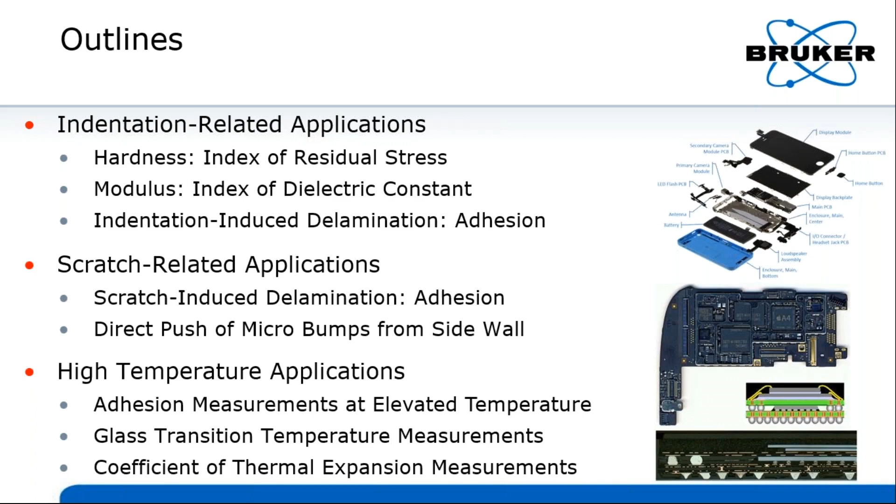Let's get started. Here we introduce the method proposed by Oliver and Pharr in 1992, which is commonly used in nano indentation. There are two key steps in the Oliver and Pharr method for the key value of projected contact area: one is the estimation of contact depth, and the other one is the tip geometry or area function.

Assuming sink-in happened at the sample at the contact with the indenter, the method uses the onset tangent of the unloading curve together with a correction factor epsilon to estimate the contact depth HC.

Once we know the contact depth, we need to know more about the tip geometry. We need a function that gives information about the indenter's projected area for each depth of penetration.

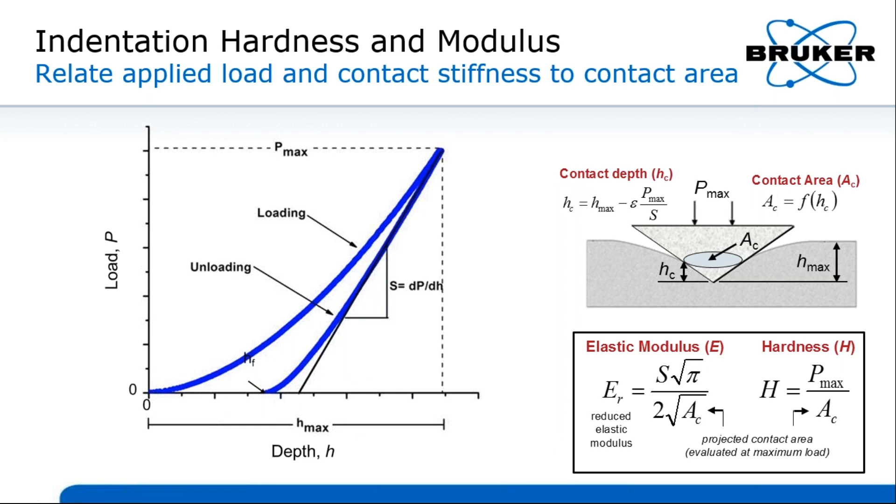Once the penetration contact area A sub C is determined, the hardness is simply the maximum load P maximum divided by the contact area. On the other hand, the reduced modulus ER can also be calculated using the unloading slope S and the projected contact area.

Therefore, the concept of one single test for one set of mechanical properties—one is elasticity and the other one is plasticity—is shown here. One biggest difference between nano and macro tests is that highly local stress-strain can be achieved and highly accurate positioning can be done.

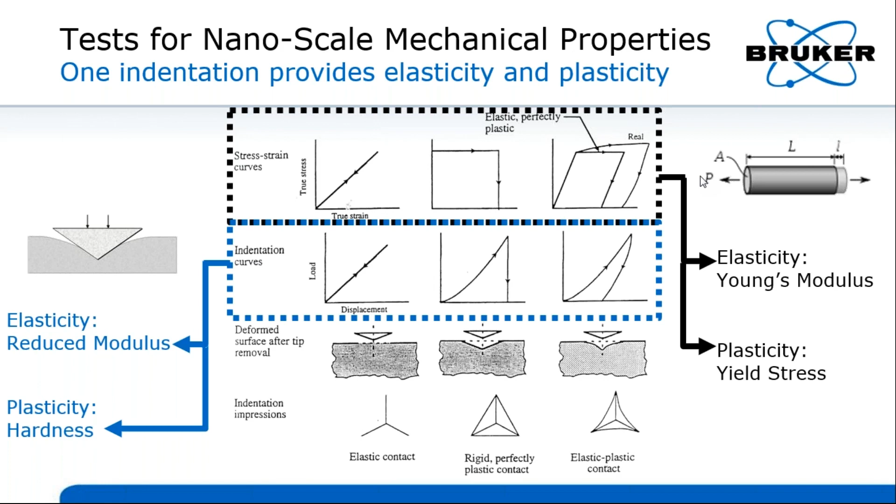With the similar concept of one test for one set of results, we are able to collect one set of mechanical properties from one single nano indentation. The elasticity is reduced modulus, and the plasticity is hardness, corresponding to the Young's modulus and the yield stress that one uniaxial test can provide.

By using in situ SPM (scanning probe microscope) imaging, we can utilize the same probe used for nanomechanical testing to image the sample surface and obtain high-resolution images from which one can identify and specify the testing locations. It is very important to navigate around a sample's microstructures and to avoid roughness before performing nano indentations. On the other hand, after indenting, we can also go back and re-image the sample surface to verify correct indent location.

Once the post-image of the indents has been performed and the precise indent location has been confirmed, we can have high confidence that the quantitative data is reliable.

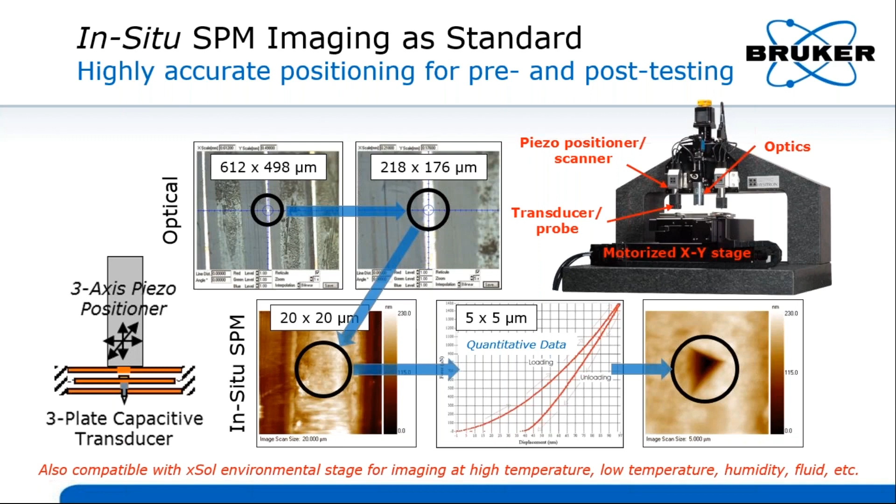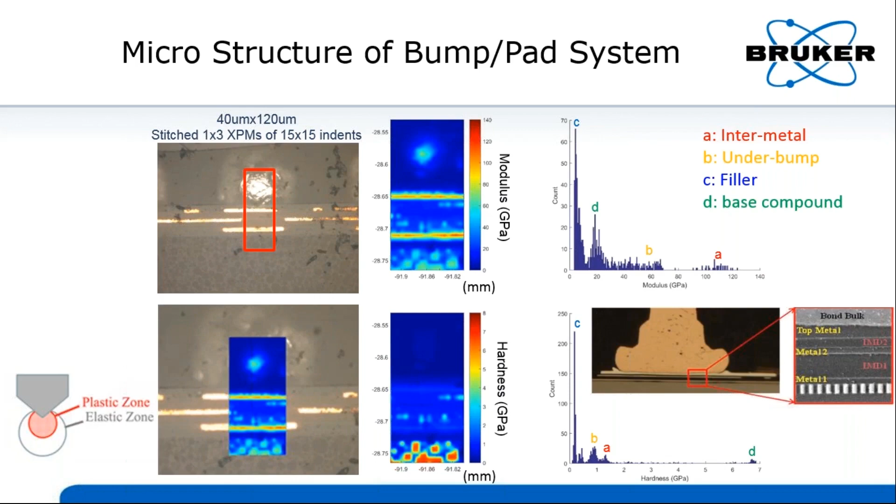The indentation measurement contains information about the deformed volume. Therefore, indenting into a sample is potentially capable to detect the information of underlayer. Since the indentation measurement contains information about the deformed volume, indenting to a film substrate sample is capable to detect the information of both the film and the substrate.

When the applied load is small enough, the penetration depth is small and the deformation zone could be within the film. In this situation, the collected mechanical properties could be contributed by the film only. When the applied load increases, the indenter goes deeper and deeper, and thus the deformation zone gets bigger and bigger.

A substrate effect is observed when the deformation zone reaches the substrate. In this situation, the collected hardness and modulus are contributed not only by the film but also by the substrate. There is a transition of hardness and modulus changing with the penetration depth. At small depths, the film properties dominate, and at large depths, the substrate properties dominate.

Typically, the 10% rule is a general approximation for film's intrinsic mechanical properties. That is, we will collect the small depth data with the penetration depth smaller than 10% film thickness. As the films become thinner and thinner, the elastic deformation reaches the substrate at very shallow depths, and it can be very difficult to make measurement without any substrate influence.

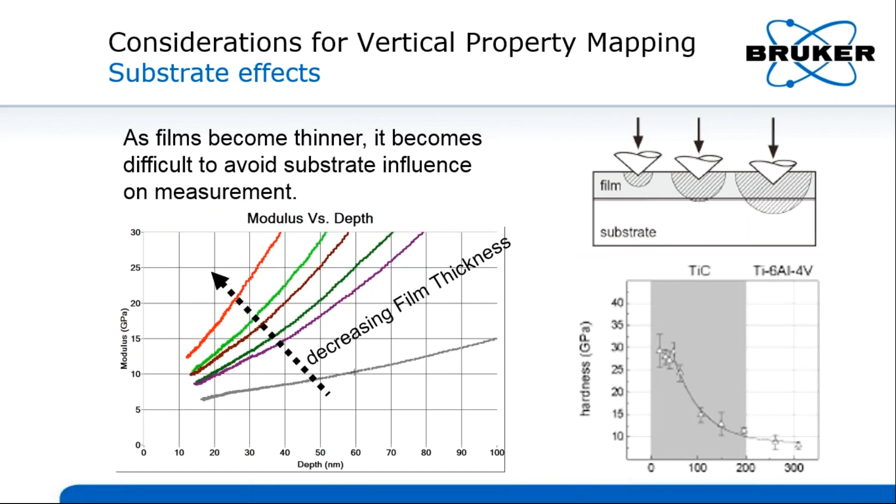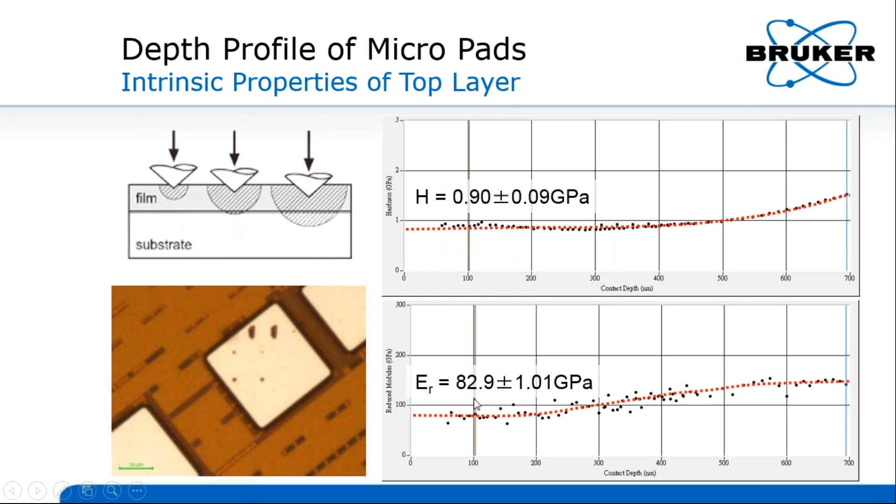Before going to the next application of micropad, let's take a look at the orientation effect in copper's modulus, because copper is the common material for pad. Copper's modulus is highly sensitive to orientation. We know copper has the structure of face-centered cubic, and there are three main orientations: 100, 110, and 111.

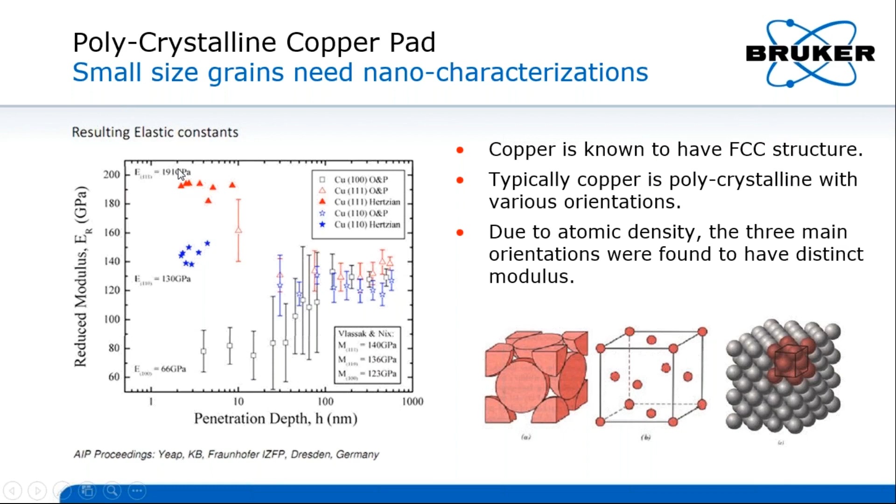Theoretically, the three orientations have very different modulus values due to the different atomic density. However, traditional tests cannot differentiate the modulus if the deformation zone or deformation size is larger than the average grain size. The three modulus values can be only detected separately using true nanoscale measurements. As reported on the left chart shown here, the penetration depth goes down to several nanometers, and at this shallow depth region, these three orientations have clear different modulus values.

Here we demonstrate an example of micro copper pad with a square cross-section of 14 microns by 14 microns. Within the cross-section, an indentation array of 15 by 15 indents were performed at room temperature. After that, we have a modulus map with the corresponding histogram shown here.

There are two portions shown in the modulus map of the cross-section. The left portion has higher modulus, and the right portion has lower modulus. Comparing the two peaks showing in the histogram, one is around 60 gigapascal and the other one is around 120 gigapascal.

Comparing the two peak values with the three orientation modulus of copper mentioned previously, it is easy to figure out the lower one is 100, and the higher one is 110. That is, we can assume that only two grains exist in the cross section of the micropad, and one is 100, the other one is 110.

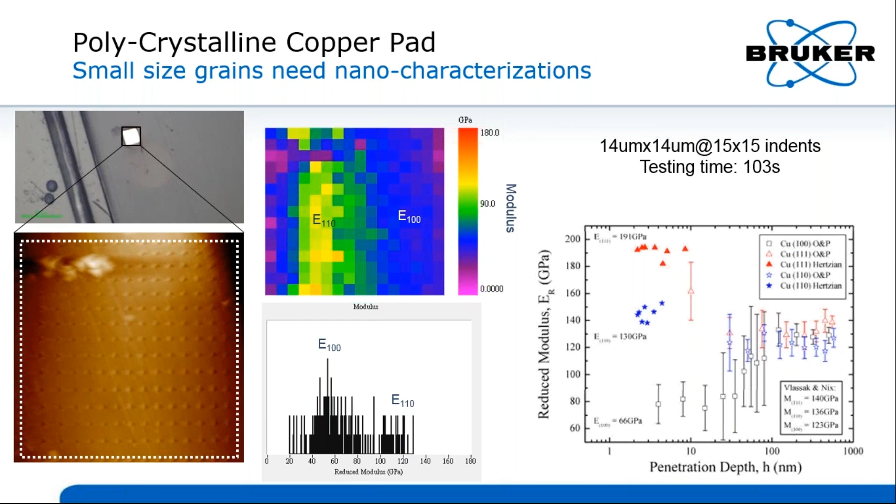Now we are going to the first application of indentation, the residual stress. Let's take an overlook at the scales and the metrology techniques of coatings residual stress.

A lot of reports show that the performance of semiconductor materials is highly sensitive to residual stress. Therefore, residual stress is always an important factor for semiconductor materials. Residual stress is a multi-scale problem, and this slide shows a classification of 3 types of 3 scales. There are 3 different metrology techniques corresponding to the 3 types of residual stress.

Type 1 is the macro residual stress, which is global stress over the entire wafer. The technique for type 1 residual stress is the warpage method, which needs measurements of curvature.

Type 3 is atomic scale residual stress due to crystalline defects. The technique for type 3 is X-ray diffraction, XRD. Between them, type 2 residual stress is at the micron scale, and the technique is indentation hardness, which is what we are going to discuss.

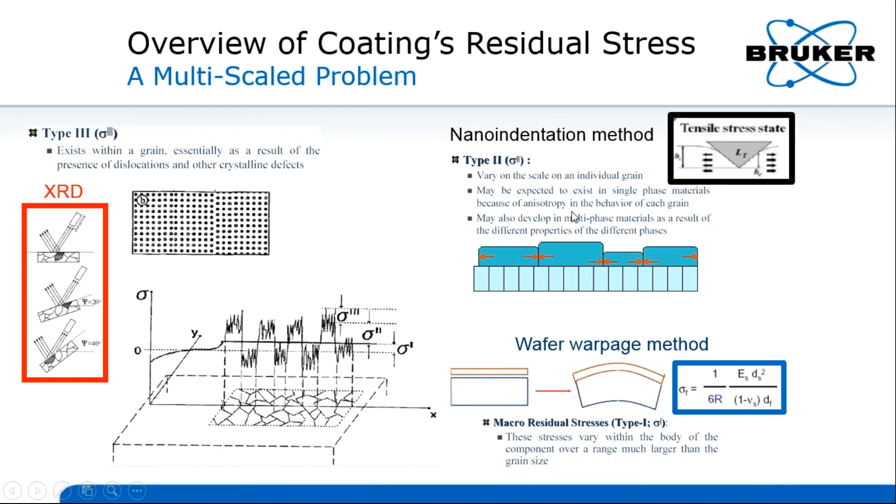Indentation hardness is sensitive to residual stress within the tested sample. Compressive residual stress was found to linearly increase the indentation hardness, while tensile stress does the opposite. Therefore, indentation hardness can be used as an index of residual stress.

Here we have 2 wafers of 1 micron silicon oxide films undergoing different treatments. The type 1 stress was measured using the warpage method, and the value of stress is shown here. Wafer 14 has higher compressive residual stress compared to wafer 13.

We have 9 indentation tests collected from each wafer, with the load-depth data shown in this plot. Since the repeatability is very high, we can clearly see the penetration of wafer 14 is smaller than that of wafer 13 at the same peak force. It indicates wafer 14 has higher hardness, which is due to its higher compressive residual stress.

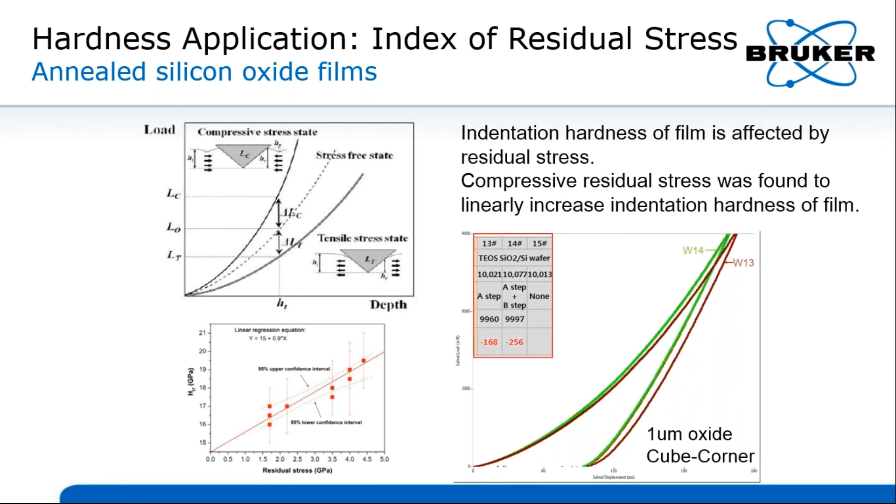Another indentation application is modulus as an index of dielectric constant. The sample is a low dielectric constant film, called a low-K film for short. Typically, low-K films are porous in order to get lower dielectric constant, and UV curing is one of the important processes.

Since both dielectric constant and modulus were found to be related to porosity, a positive correlation was reported between the dielectric constant K and the modulus. Therefore, higher modulus corresponds to higher K, and lower modulus corresponds to lower K.

This concept will help us achieve the main purpose of this work, which is to figure out the dielectric constant distribution in the thickness direction and check the vertical uniformity due to the UV curing.

In this case, we used scanning wear as nanomachining to remove the low-K film by 40 nanometers and 80 nanometers at one pass and two passes respectively. After that, we carried out modulus mapping to get the modulus on the top surface, the 40 nanometer depth surface, and the 80 nanometer depth surface.

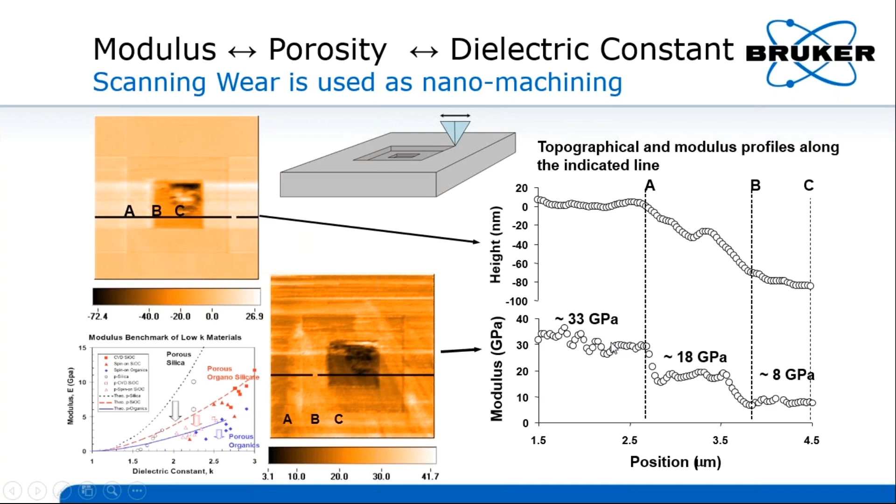Let's go back to take a look at the scanning wear in detail. Based on the in-situ scanning probe microscope, SPM, nanowear can be done by setting scanning load at different levels. In addition, the number of passes is also a useful parameter for nanowear.

After finishing nanowear with the set force and number of passes, the post image can be collected using the in-situ SPM to quantify the wear volume. It is not only for nanomachining, as shown in the previous case, but also powerful to measure wear resistance directly.

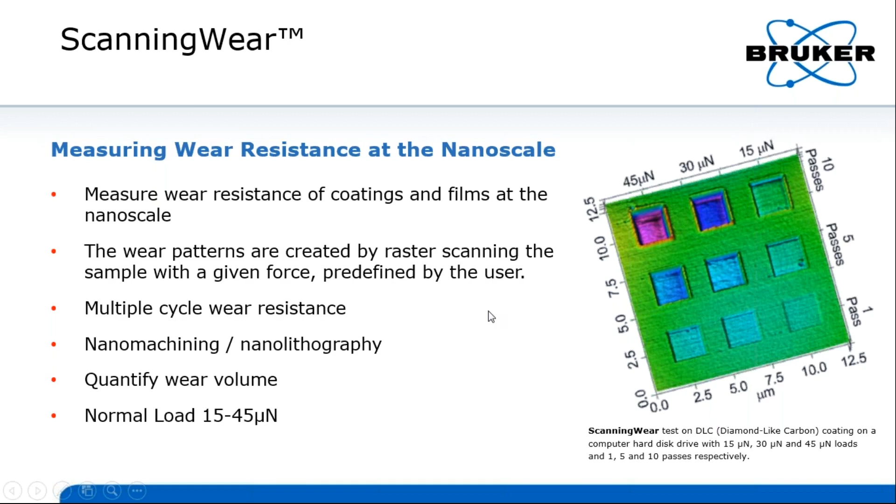Here we have the application cases with three different hard coatings, and wear resistance is the tribology property for investigation. In this case, we selected three different applied loads from 50 millinewton to 200 millinewton. No matter if the applied load is high or low, sample 3 was found to have smaller wear depth compared to the other two, which suggests better wear resistance.

One emphasized point here is that even at the lowest force of 50 millinewton, the residual depth is smaller than 1 nanometer. The high sensitivity of the nanowear is still capable of differentiating the wear resistance of the three samples.

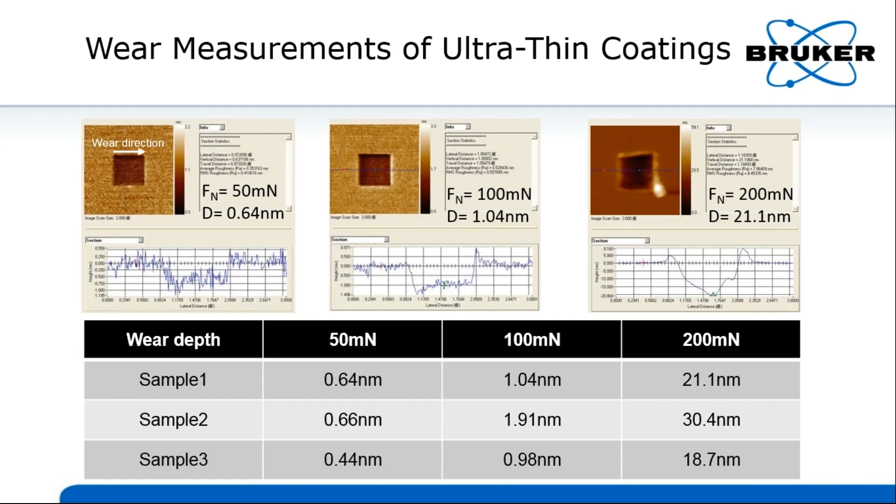Now we are going to the topic of interfacial bonding, or adhesion measurements. Since the number of thin films existing in semiconductors is huge, the number of interfaces is also huge. Therefore, interfacial bonding is one of the important properties for thin film industries. Here we show a variety of metrology techniques for adhesion measurements.

The common point is applying load to delaminate coating from substrate. Some techniques need specific sample preparations, and some need ex situ measurements. Among all of these techniques, nano indentation and nano scratch are really suitable for thin films due to two main advantages. One is direct measurement, where the probe can be directly applied onto the sample surface without any preparations.

The other advantage is high spatial resolution. Typically, the nano scratch length is at the micron level, and nano indentation is at the submicron level. Therefore, a large number of tests can be performed on the entire wafer, and it is very useful for distribution check or uniformity check.

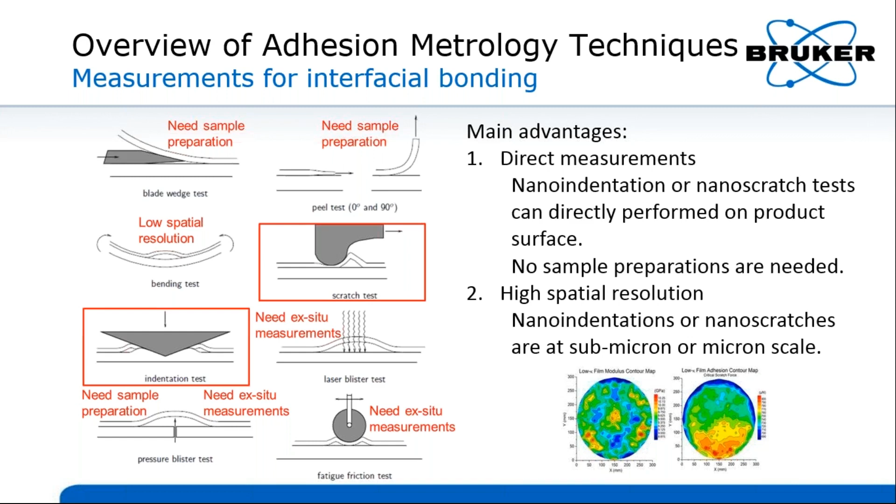Here we go to the first adhesion application using nano indentation. The sample is a thin nitride film on copper. The main challenge here is that the sublayer of copper is polycrystalline and has grain boundaries. The nitride top layer film is so thin that the copper's grain boundary cannot be fully buried. In this situation, in situ SPM is very useful for detecting the surface texture of grain boundaries.

We can see the average grain boundary grain size is around several microns. Therefore, there are about 10 grains existing in one SPM image with a 10 micron scan size. After having the pre-scanned image, it is convenient to choose a suitable location within grains to avoid making indents on boundaries. Therefore, we can also have the post image after making indents to make sure all indents are made at the specific site that we set.

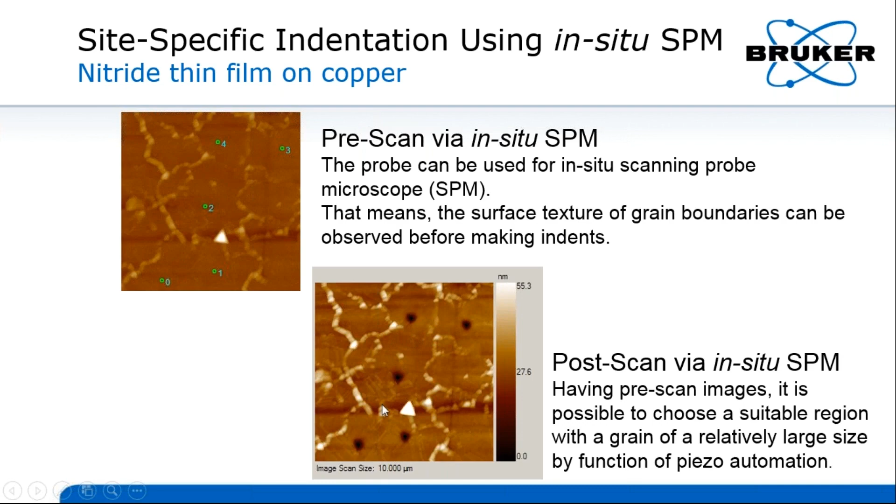Since we are able to ensure all indents were within grains, the information of indentation is not affected by the boundaries. There are popping events that happen in all indents, and they are signals of delamination between the nitride thin film and the copper. The mechanism of indentation-induced delamination is shown here. When indentation load was applied into the nitride film, the in-plane stress increased, and at the critical point, the interface debonds. In this case, the load at the biggest pop-in event was picked as the critical load, which is an index of adhesion.

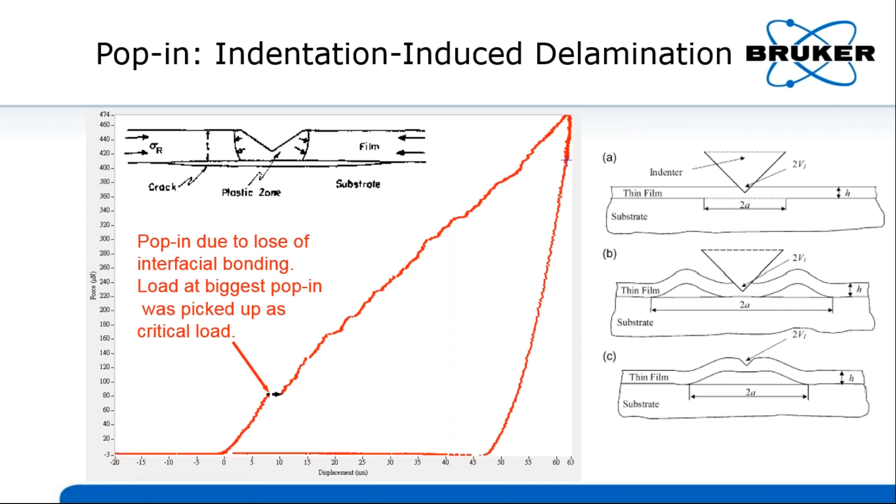On the other hand, we also applied nano scratch to measure the nitride-copper adhesion. The nano scratch test is quite flexible and can be set up in a number of ways, but there are two main categories of tests usually employed. In a scratch test, the lateral axis is always operated in displacement control feedback, so the user specifies a scratch length and speed. In the normal axis, it can be operated either in load or displacement control, but load control is more common. A ramp force scratch test is probably the most common type for testing film adhesion.

During this type of test, the normal force is increased continuously as the probe moves laterally. As the probe penetrates deeper and deeper, increasing stress is placed on the film and substrate interface. At a certain point, the interface fails and the film delaminates. If the film is brittle, some events such as cracking or chipping may also be observed.

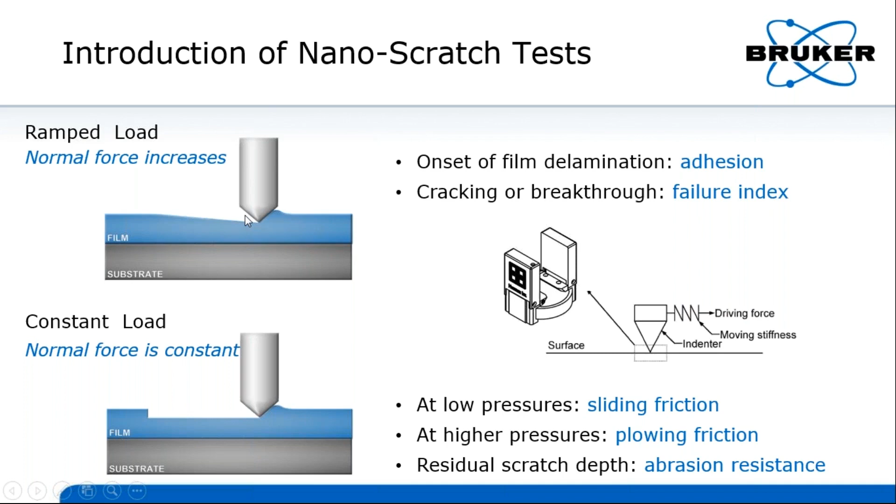Let's go back to the thin nitride film on copper case. We have to deal with the grain boundary problem for the scratch test also. One helpful thing we can do is set a pre-scan segment for the nano scratch test. Before scratching, the probe was moved along the path with a small contact force of around 1 or 2 micronewton. The normal displacement data for the pre-scan segment is useful for both tilt correction and line scan profile measurement. Since the measurement path is exactly the same as the scratch path, it is useful for observing surface texture and roughness effects.

And here, we will use the pre-scan data for grain boundary observations. From the pre-scan data, we can see the grain boundary was detected during the path of 10 micron length, and 2 grain boundaries were detected.

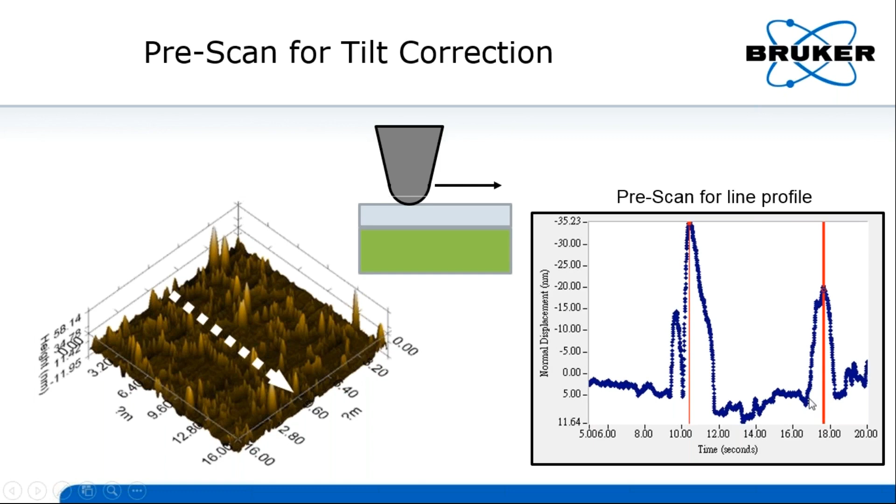After that, we made a ramp force scratch going through the same path, and the results are shown here. You can see the normal force increased linearly as it has been set. There are 3 signals showing both the lateral force signal and the normal displacement results.

Since we have the pre-scan data of the line profile of the scratch path, and the direction of pre-scan is opposite to the direction of the scratch, all we have to do is use the reverse of the line scan profile for checking the locations of the grain boundaries. Therefore, the first 2 signals are clearly recognized to be induced by passing the grain boundaries, and the third signal is due to the delamination.

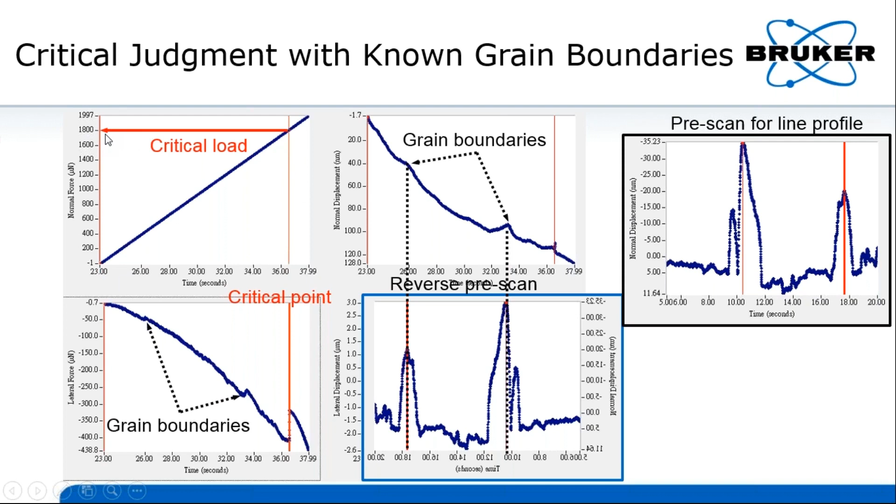Therefore, we can judge the critical point as the third pop-in and pick the normal force as the critical load. Since we collected the critical load results using both the indentation method and the scratch method, the comparison is available.

Here we put the scratch critical load on the x-axis and the indentation pop-in critical load on the y-axis. A linear relationship was found between the critical loads collected from the 2 methods. That indicates both of these indexes are suitable for adhesion measurements in this case, and we can actually convert one to another using this formula.

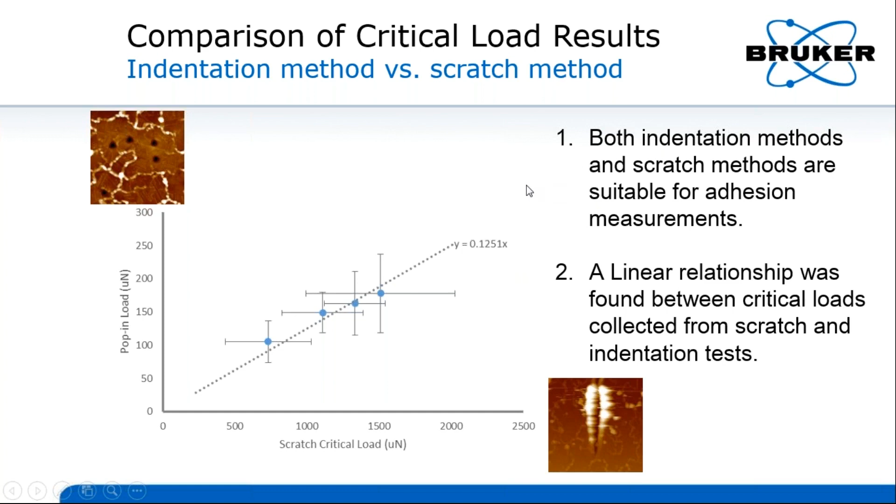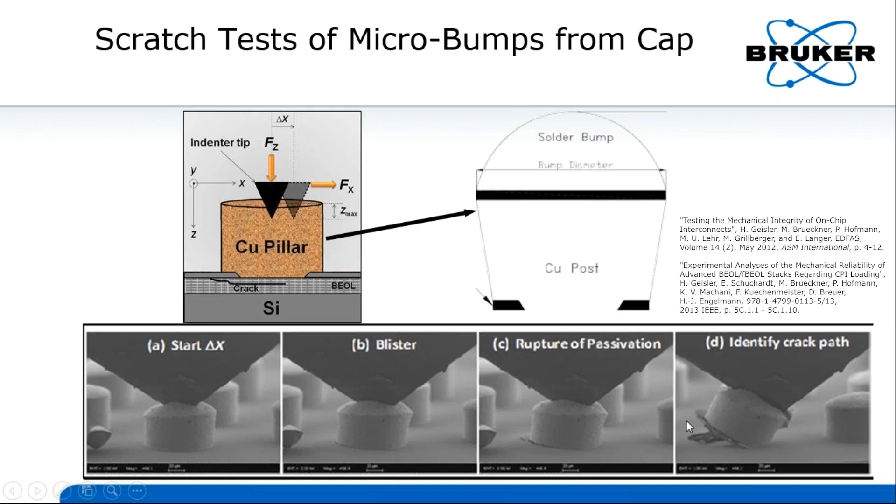Actually, we can perform some examples of testing in different directions. We can check the collected lateral force and pick up the critical values as the bump is pushed down. One-by-one bump tests can provide the distribution of the interfacial bonding of the under-passivation layer.

Not only investigation for uniformity, we can also set scratch tests in different directions to see the anisotropic effect. The most significant feature of this mode is the crack of the passivation underneath, which can be found on the touch surface on the opposite side of the scratch direction.

Besides the scratch from the cap, another scratch mode we can perform is direct push from the side wall using a special wedge tip. Shown here, we can land the probe next to a bump and push it from the side wall. Due to the high sensitivity and low noise floor, the probe can be landed with very small contact force.

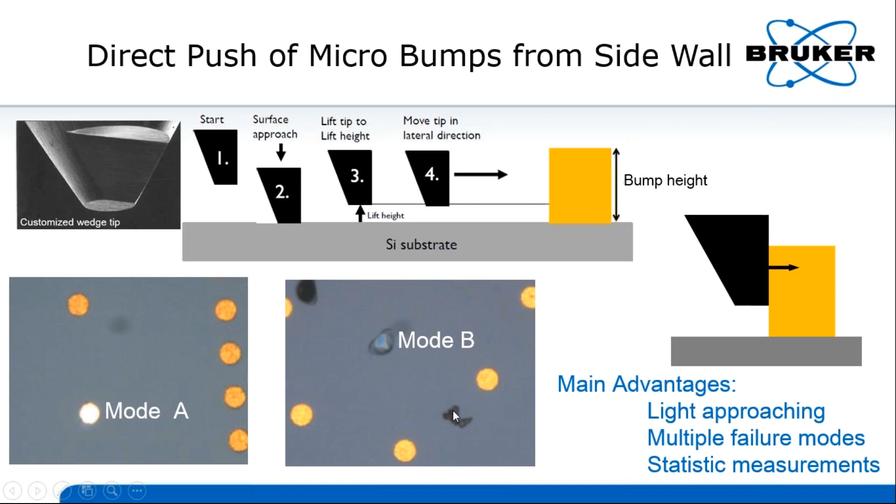Now we will go to another application case of adhesion, which is also a direct push from the side wall, but the entire test is performed in SEM. This is a beautiful work done by one of the Japanese users of in situ tools.

The interface is between copper and the passivation layer of nitride and oxide, which is used in semiconductor devices, shown here. The main topic is how orientations of copper affect the interface bonding.

The idea is to finish all tests in one SEM chamber. Therefore, the sandwich structure of the sample was designed with the passivation layers as the top layer and the copper layer as the under layer.

The first step is using FIB to create micropillars of passivation standing on different locations of the copper surface. After that, use the probe to push the micropillars from the side wall and collect the force required to push them down. In order to turn the critical load into the adhesion work, a finite element method was established, shown here.

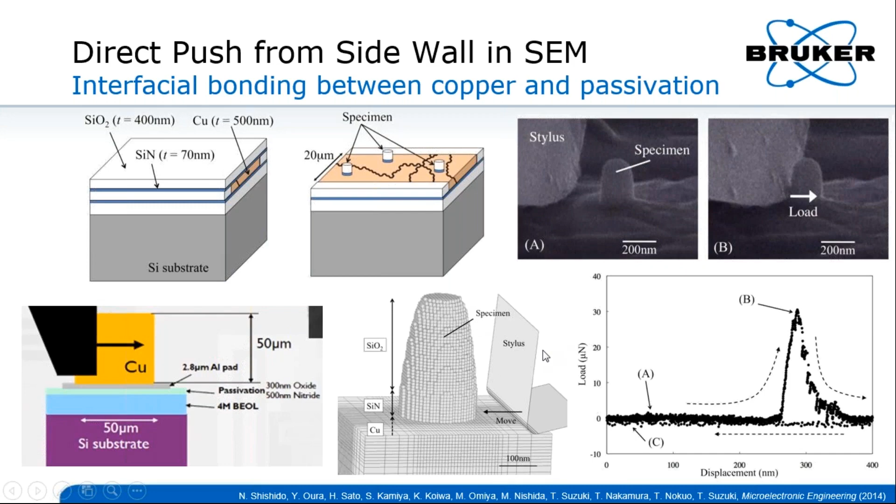Finally, the copper surface was moved to the EBSD gun for orientation measurements. The results suggest the 100 orientation has the highest adhesion work, and the strongest interfacial bonding was found in this orientation compared to the other two orientations.

Once the sample is ready, let's recall the entire steps of this beautiful one-chamber design. Firstly, the sample of sandwich structure gets into the SEM with the PI88 stage, with control of orientation and tilt—everything's ready.

First, we move the sample to the FIB gun to create the micropillars, then move the pillars to the probe for direct push from the sideward. Finally, we move the sample surface to the EBSD gun for orientation measurements. It is so smart and efficient to get all necessary measurements done in one SEM chamber.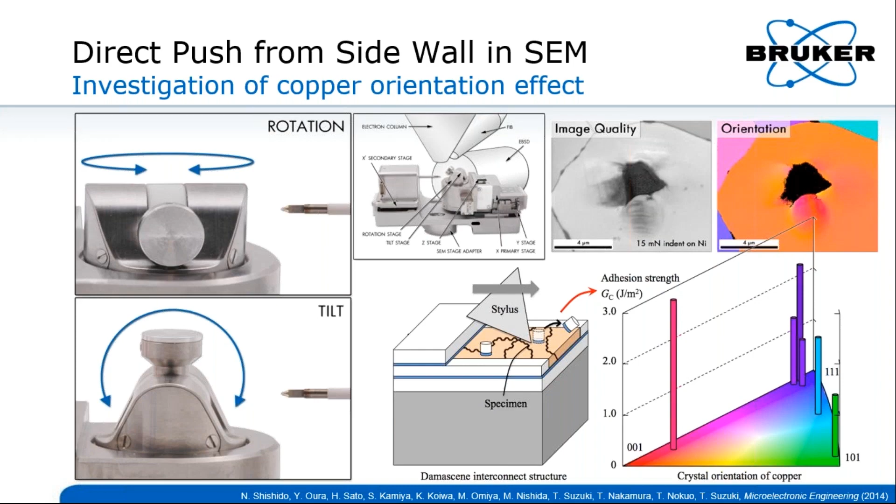Now we are going to high temperature testing. In a lot of cases, measuring properties at room temperature is one thing, and measuring properties at different temperatures is another story. Properties at different temperatures are always interesting and important.

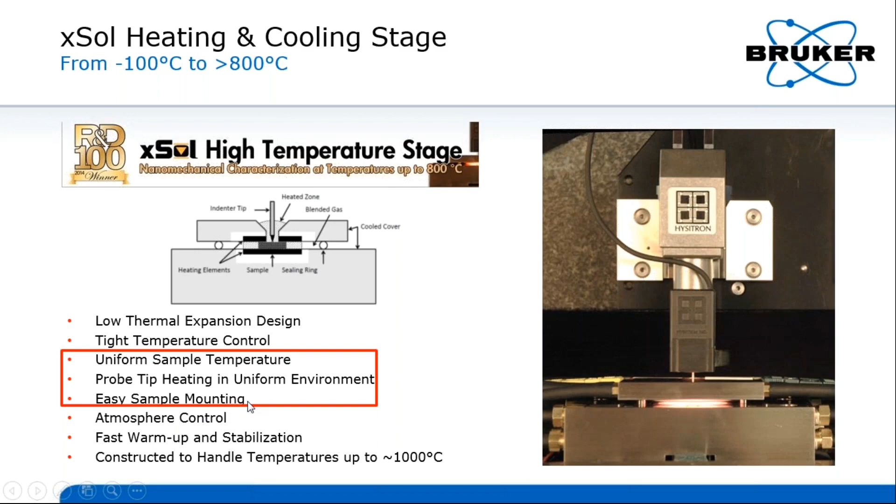The tip on the long shaft is designed to go into the chamber through the hole of the top heater. Therefore, the tip can be heated to the same temperature before making contact with the sample surface. Dynamic testing capabilities are also available. On the other hand, no glue is needed since the heaters are designed to clamp the sample—a significant advantage, because glue could be a big problem, especially at very high temperature.

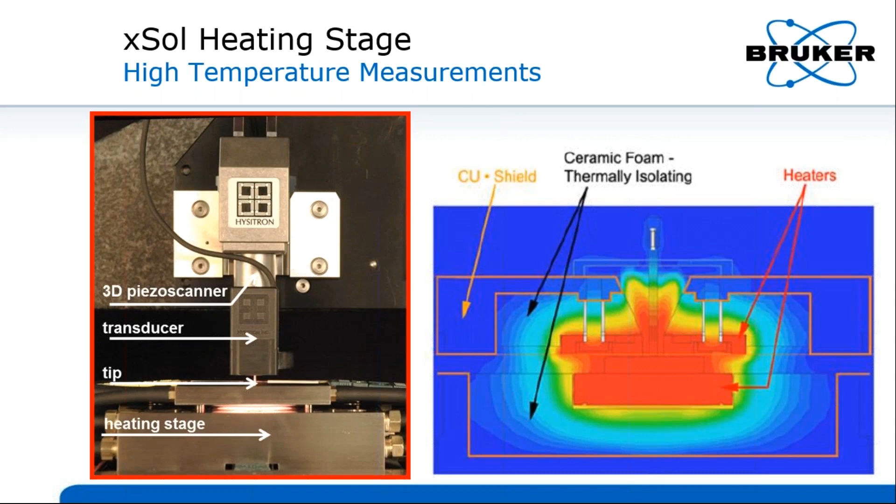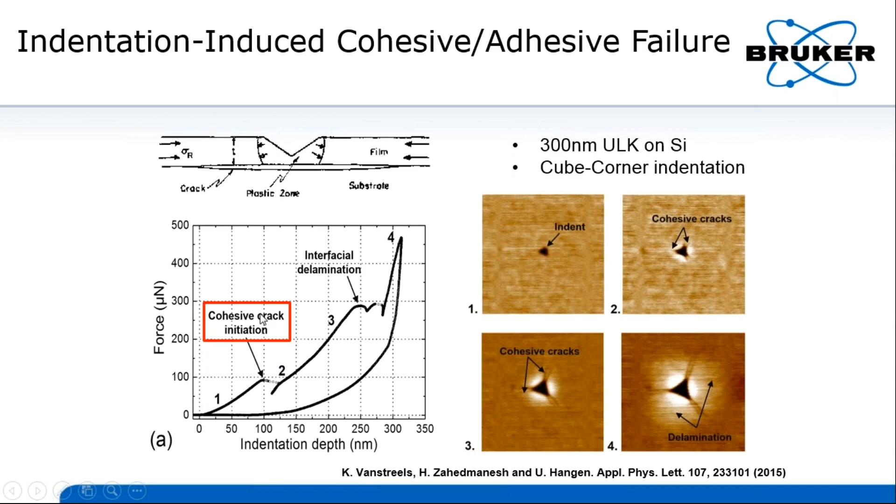Therefore, this suggests the possibility of detecting the CTE of the low-K film, since the CTE of silicon is well known. I would like to skip the details of calculation for the film's CTE—you can find the details in this published paper. Here we simply get the idea that indentation methods for adhesion or cohesion measurements can be done at elevated temperature.

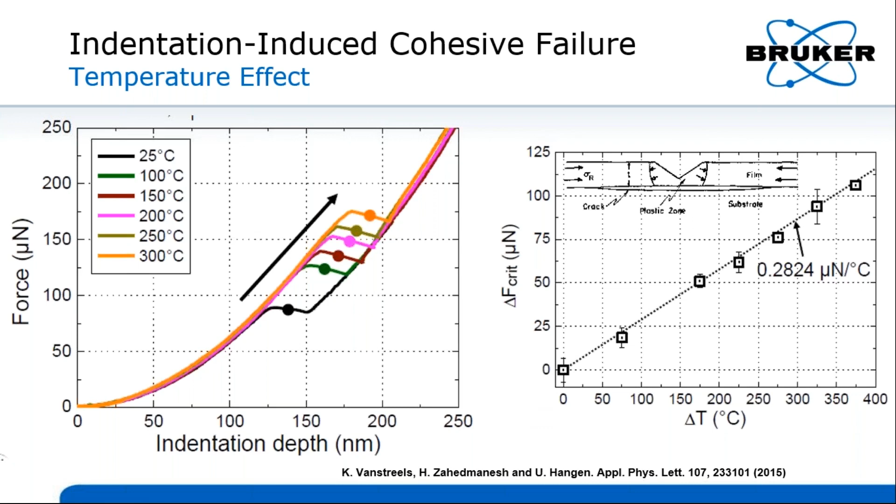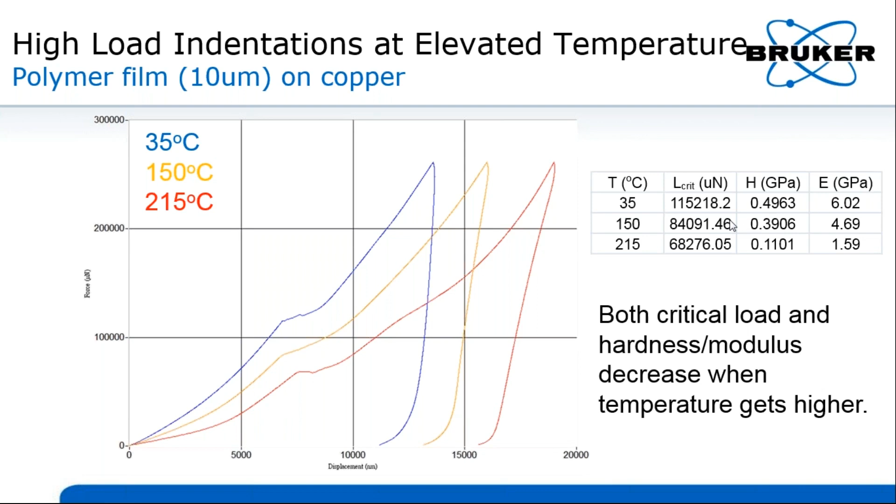Talking about the glass transition, dynamic mechanical analysis (DMA) is one of the commonly used techniques. DMA measurements can provide three judgment rules for glass transition temperature, TG for short. One is storage modulus onset, and the other two are loss modulus peak and the tan delta peak.

Compared to the rule using storage modulus onset, it is easier to apply the peak rules for determination of TG. One point to emphasize is that glass transition is actually a band of temperature, not really a single temperature point.

The DMA measurements provide an advantage of three observations for glass transition. The storage modulus onset suggests the beginning of the glass transition, and the loss modulus peak happens at the middle of the glass transition. Finally, the tan delta peak is the end of the glass transition. Therefore, using DMA at different temperature levels, we can get the full information of glass transition.

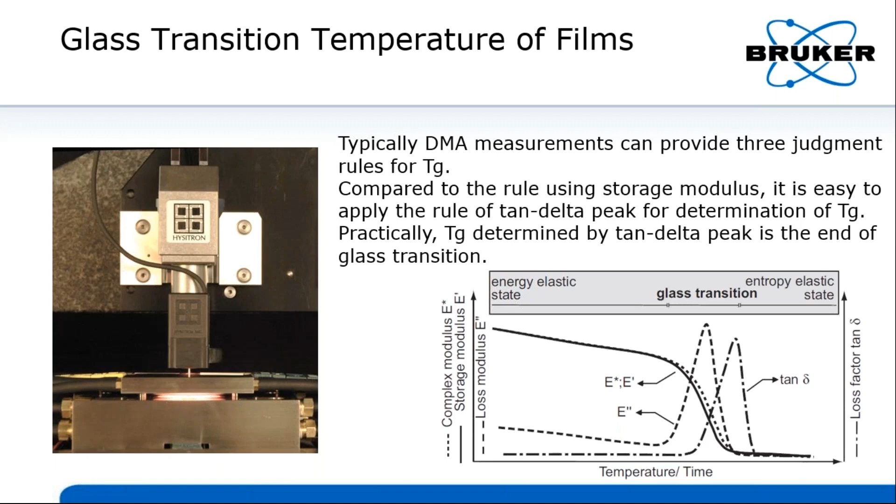However, in the case of thin films, nano DMA could be of much help, since the sample can be put directly on the heating stage and dynamic indents can be made on it. Let's go to an example showing how nano DMA works for thin films.

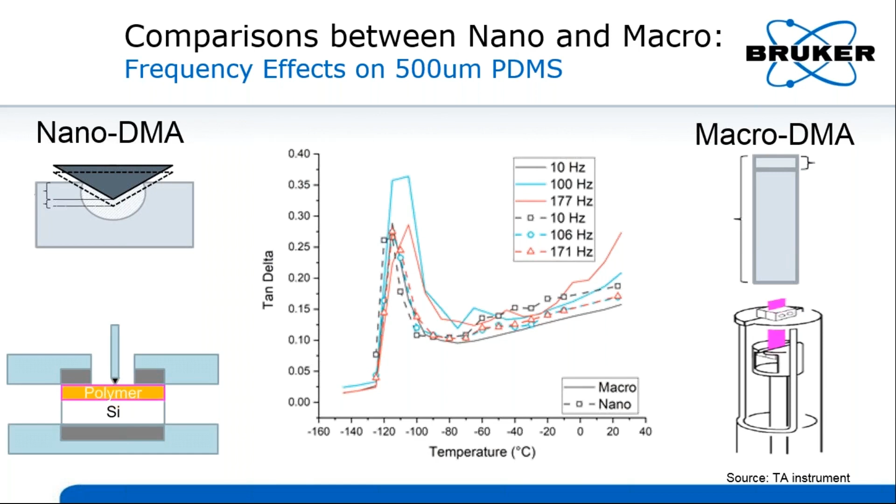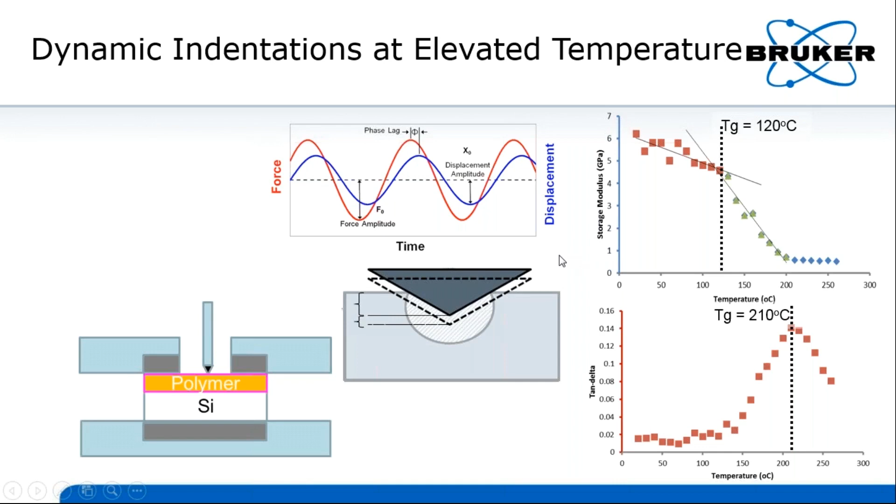Another point we can see is that the storage modulus before Tg is around 5 gigapascals, and after Tg it drops to around 0.5 gigapascals. This is a typical observation of going through the glass transition.

The final topic of heating high temperature measurements is the coefficient of thermal expansion, CTE. Here is the definition of linear CTE, which is the ratio of the size change to the original size divided by the temperature change, delta T.

On the left-hand side is a list of CTE values for materials typically used in semiconductors, including silicon with a CTE of 2.6 ppm per degree, and copper with a CTE of 16.7 ppm per degree. Today we have a case of polymer used as underfill, which has a reported range of CTE from 50 to 200 ppm per degree.

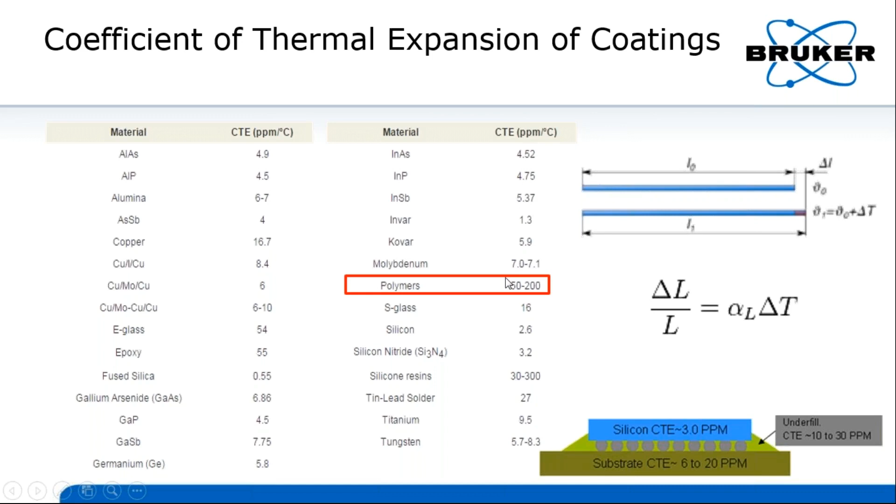Similar to TG measurements, the main advantage of direct measurement is significant for thin film CTE measurements. The 4 steps shown here demonstrate how nanoindentation together with in situ SPM works for the CTE measurements.

The first step is using the scanning probe to remove the top layer, just like the previous case about the modulus distribution in the thickness direction. The removal does not need to be 100%. The key point of the first step is to create a height difference within the film.

After that, we collect the image using the probe, including the worn region and the original region. The third step is to repeat the in situ SPM at different temperature levels. Finally, the depth change of the worn region, or the height difference between the worn and original regions, is related to the temperature change.

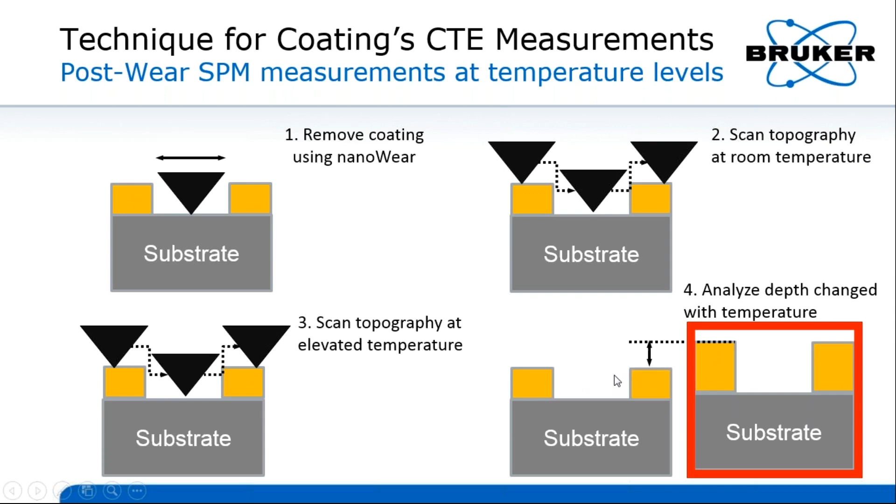We can then analyze the depth change with the temperature change to determine the CTE using the linear CTE definition.

This is the slide showing an example of this method. The sample is a polymer film with a thickness of 5 microns used as underfill. First, a worn region was created at room temperature, with a depth of around 1.5 to 1.6 microns at the beginning.

Then in situ SPM was performed at different temperature levels from room temperature up to 200 degrees Celsius, which is slightly below its TG. The depth versus temperature results show a linear relationship between them, and thus a linear fit can be easily conducted.

The slope was found to be 0.35 nanometer per degree, and the CTE can then be calculated to be 224 ppm per degree. The worn region is only a 10 micron square, and the post-wear image has a size of 50 micron by 50 micron.

Therefore, this method has very high spatial resolution. It is potentially possible to repeat the measurements across the entire wafer and get the CTE distribution from the wafer viewpoint.

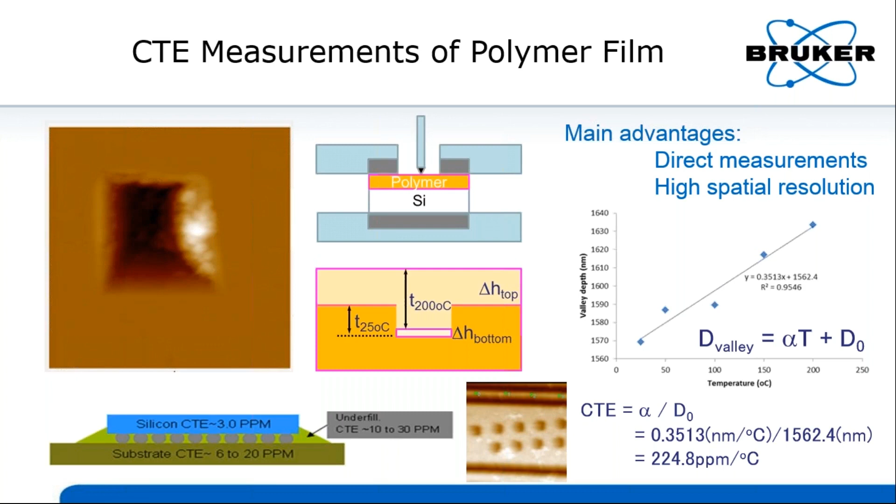This is the final takeaway slide. All the applications we present today are based on the 4 core techniques of Hysitron instruments. The main advantages of the thin film applications are direct measurements, high spatial resolution, and early index. Except for the in situ SEM cases and the high temperature cases, all other applications are based on a full wafer basis.

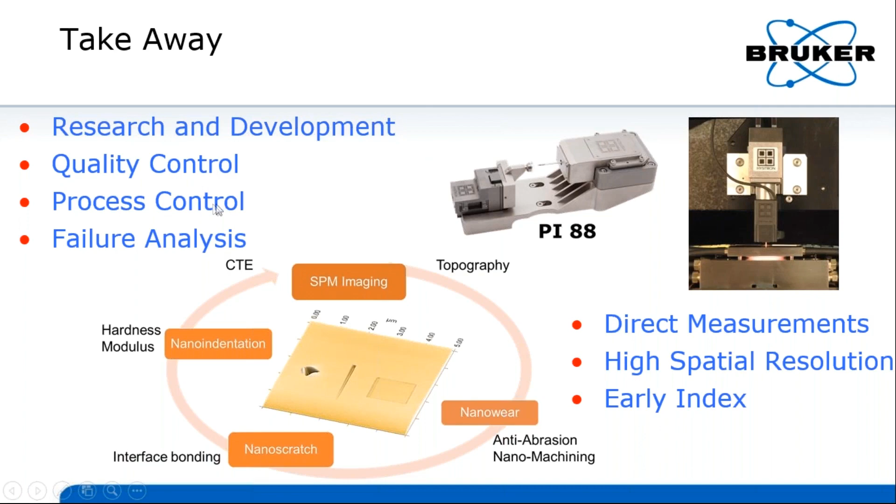I believe all today's application cases are potentially helpful for the R&D team, the quality control team, the process control team, and the failure analysis teams.